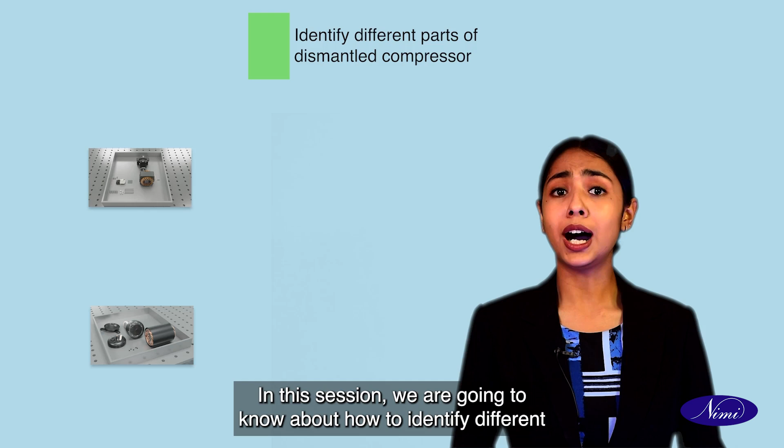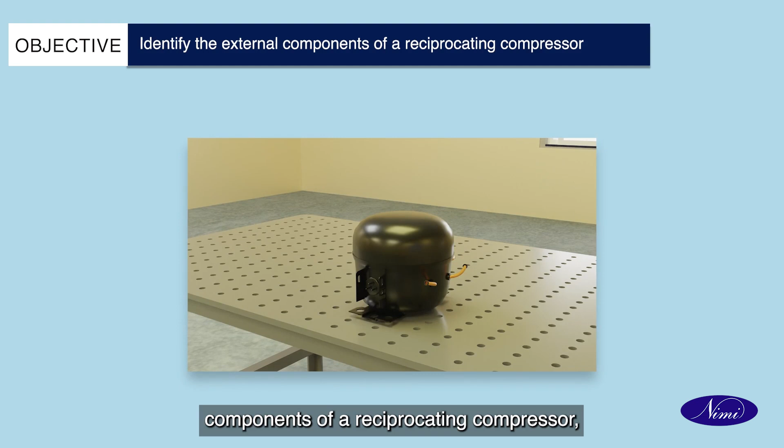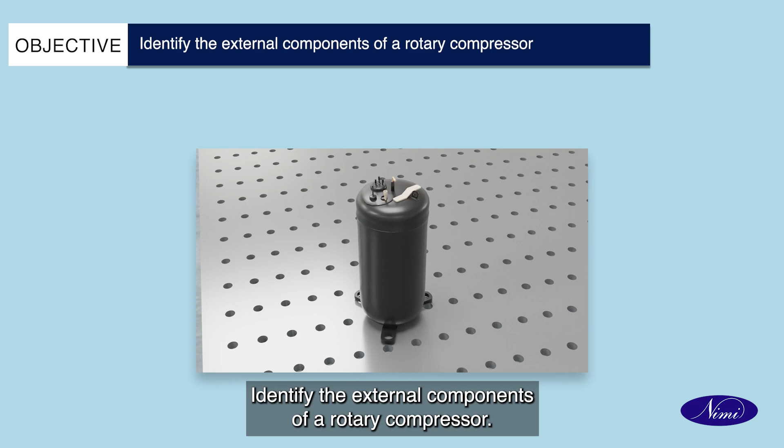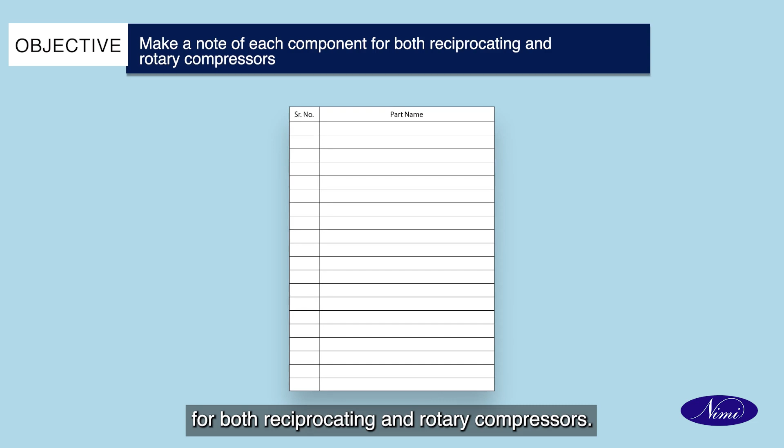By the end of this exercise, you will be able to identify the external components of a reciprocating compressor, recognize the internal components of a reciprocating compressor, identify the external components of a rotary compressor, recognize the internal components of a rotary compressor, and make a note of each component for both reciprocating and rotary compressors.

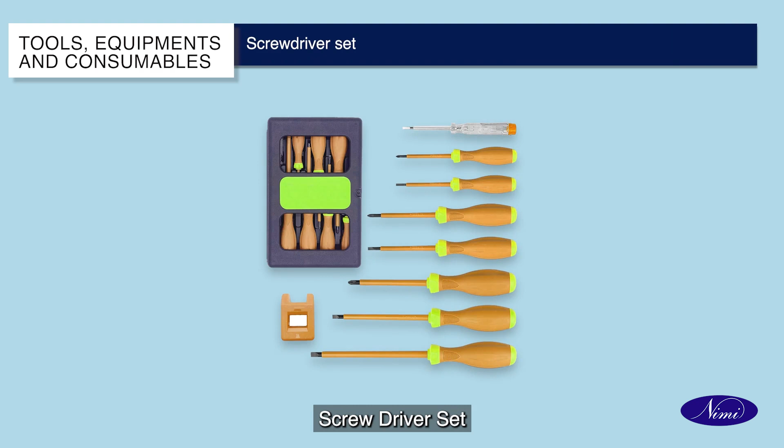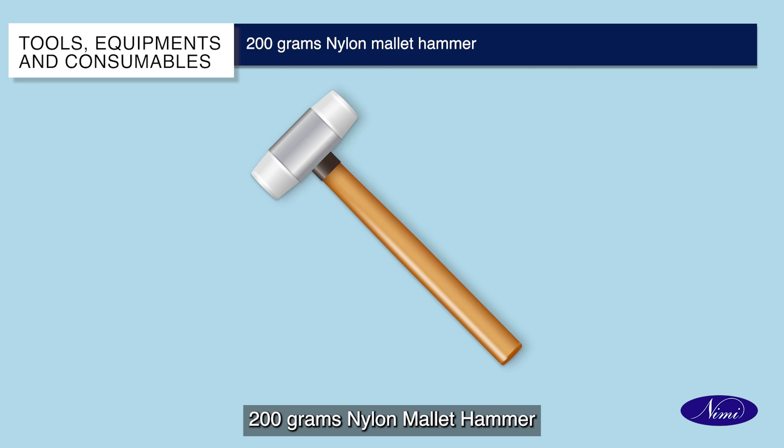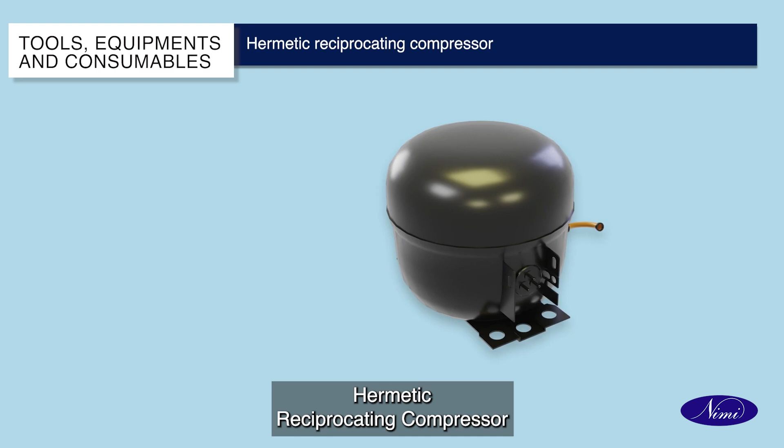Now, let's see the tools, equipments, and consumables: box spanner set with ratchet handle, ball peen hammer, screwdriver set, measuring jar, ratchet wrench, 100 mm nose pliers, 200 grams nylon mallet hammer, wooden and steel work table, mallet or hammer, bench vise, hermetic reciprocating compressor, rotary compressor, dismantled compressor parts, cotton waste.

Kerosene oil, compressor oil. Now, let us see the process of identifying different parts of the reciprocating compressor.

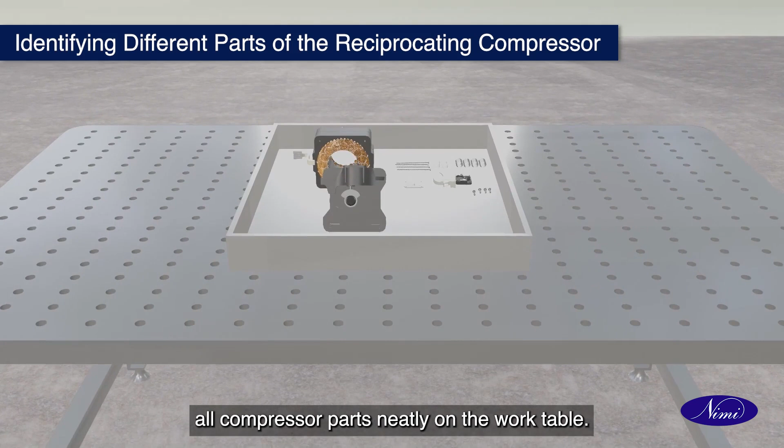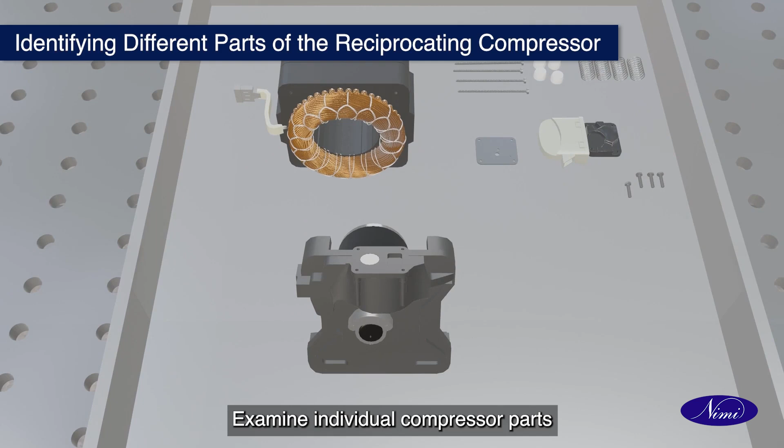Organize all compressor parts neatly on the work table. Conduct a visual inspection of each compressor part, noting its size and shape. Examine individual compressor parts closely to make sure of their dimensions.

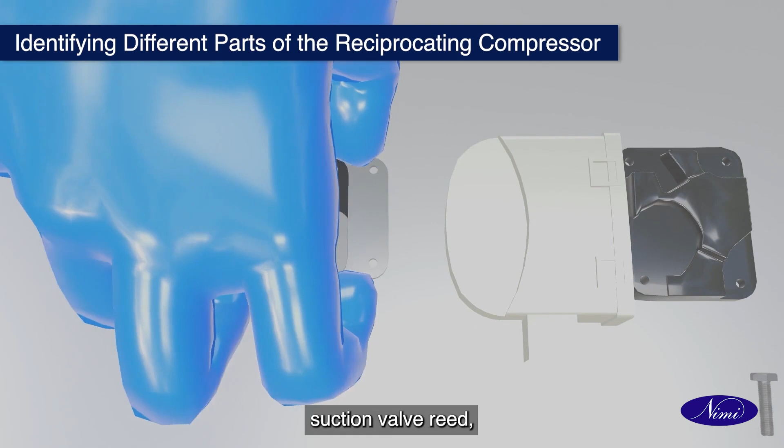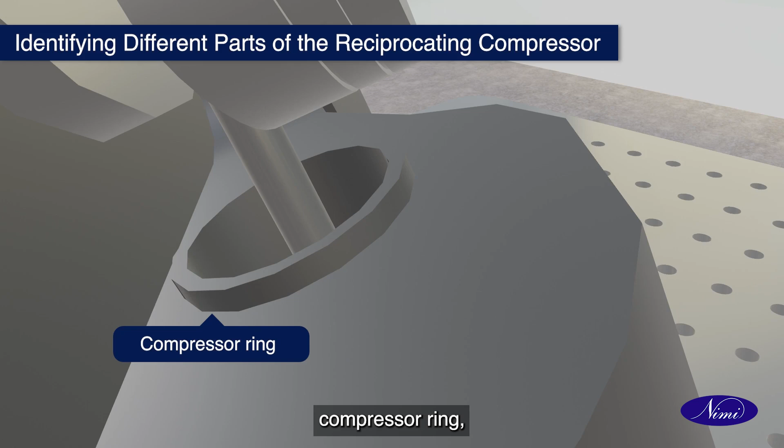Identify and record the compressor parts using table number 1, which includes valve plate, suction valve reed, discharge valve reed, head plate, piston, oil ring grooves, compressor ring, crankshaft, connecting rod, muffler.

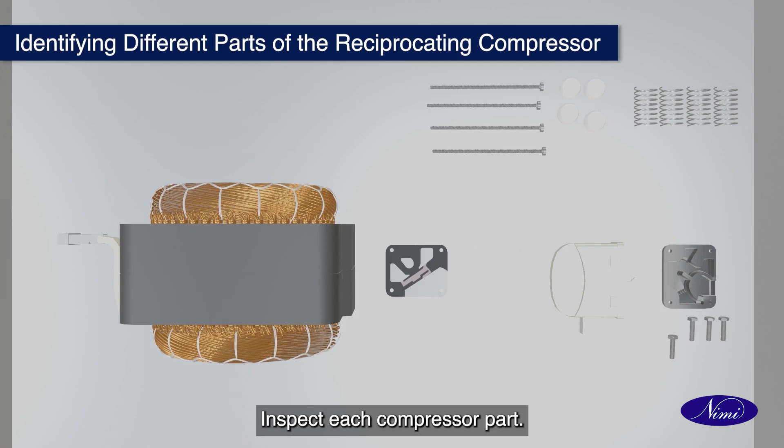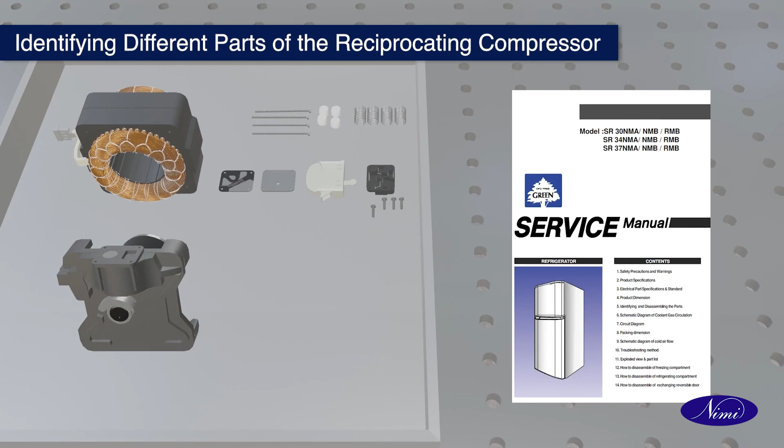Clean all components using the specified oil. Inspect each compressor part for signs of wear and tear. If any compressor parts appear damaged, replace them with new components, ensuring that you are using the correct replacement parts. When replacing parts, refer to the service manual to confirm the part numbers. Apply a thin layer of oil to each component after inspection and cleaning.

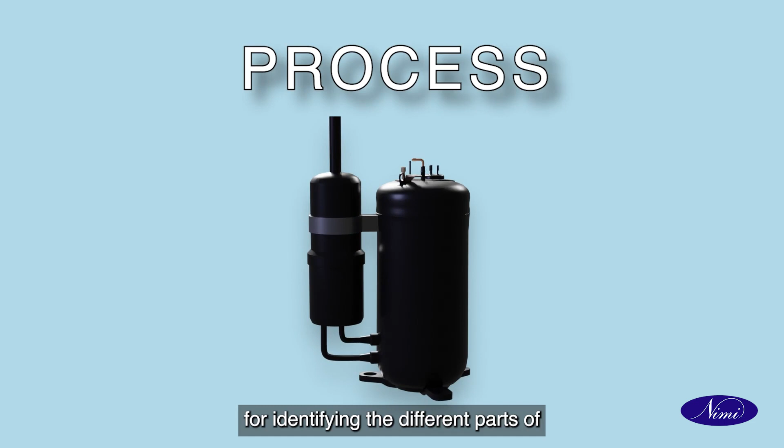Now, let us see the process for identifying the different parts of rotary compressor parts - stationary blade. Identifying different parts of the stationary blade type rotary compressor.

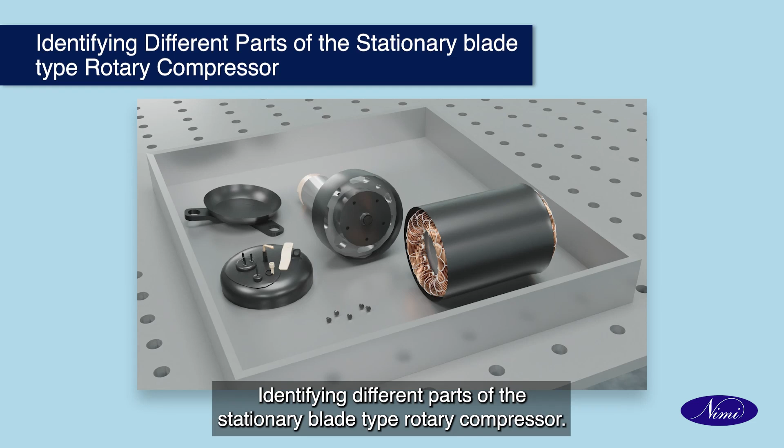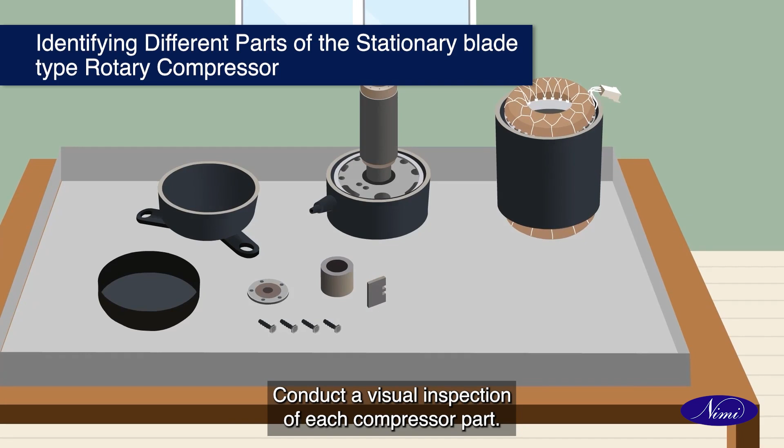Lay out each component of the stationary blade type rotary compressor on the work table. Conduct a visual inspection of each compressor part, observing its size and shape. Examine individual compressor parts closely to determine their dimensions.

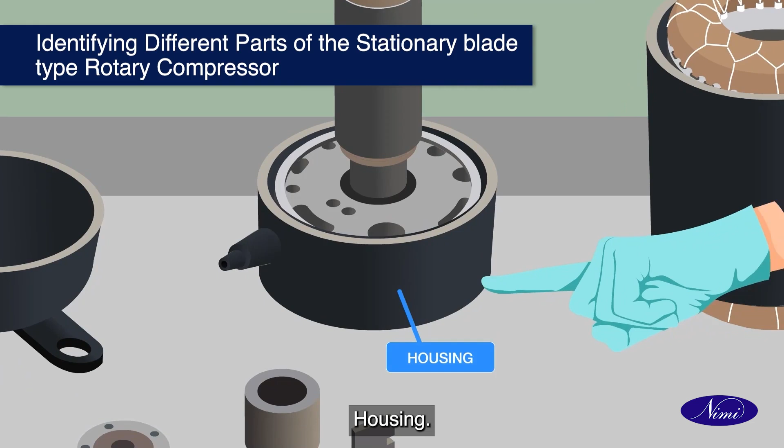Identify and list the parts of the rotary compressor in a tabular column: housing, suction service valve, discharge valve plate, blade, rotor shaft, eccentric shaft, roller impeller, cylinder.

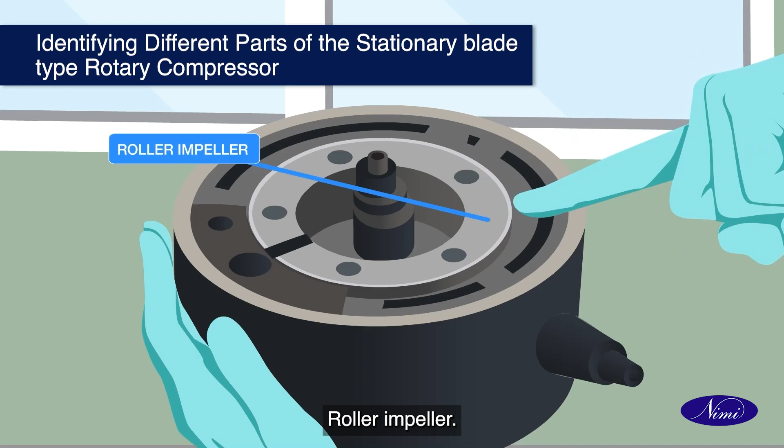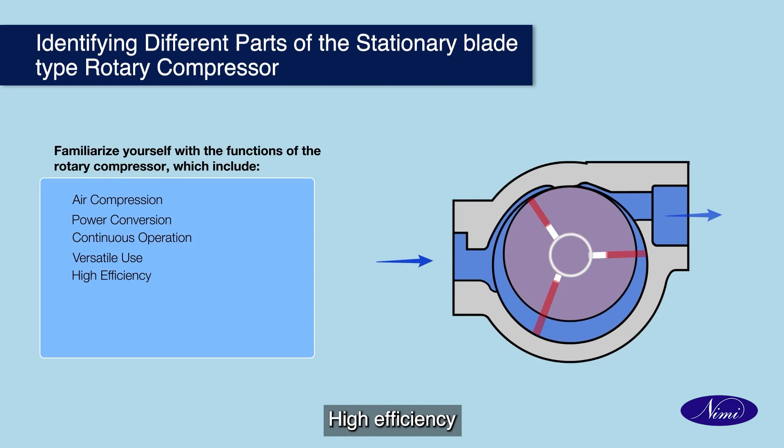Familiarize yourself with the functions of the rotary compressor, which include air compression, power conversion, continuous operation, versatile use, high efficiency, oil injection or oil-free operation, control and regulation, low vibration and noise.

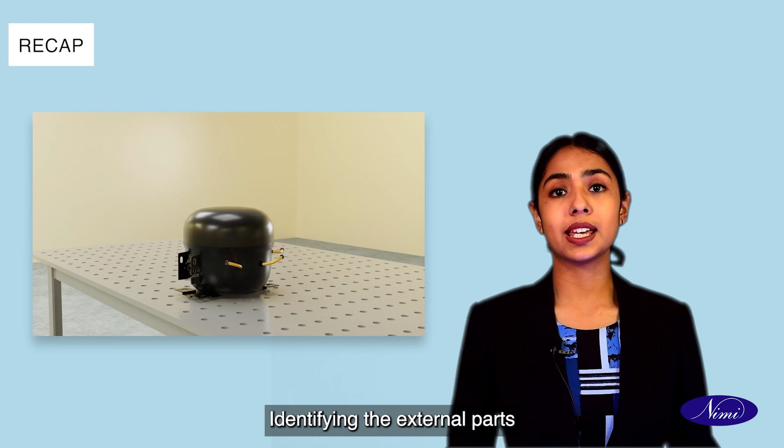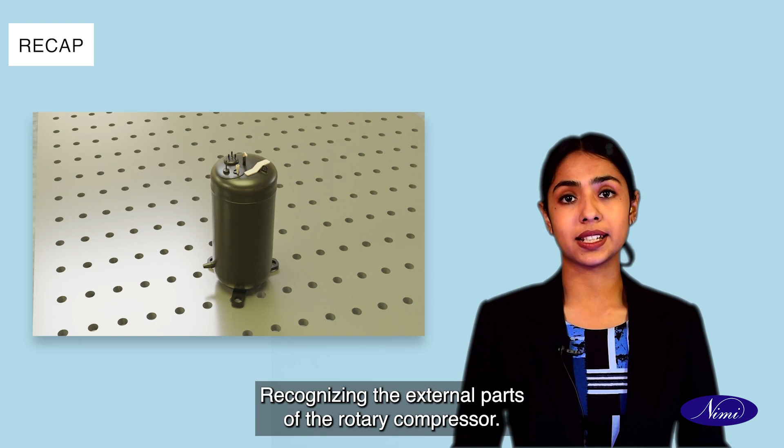In this topic, we covered the following points: identifying the external parts of the reciprocating compressor, identifying the internal parts of the reciprocating compressor, recognizing the external parts of the rotary compressor, identifying the internal components of the rotary compressor, and noting down each component of both the reciprocating and the rotary compressors.

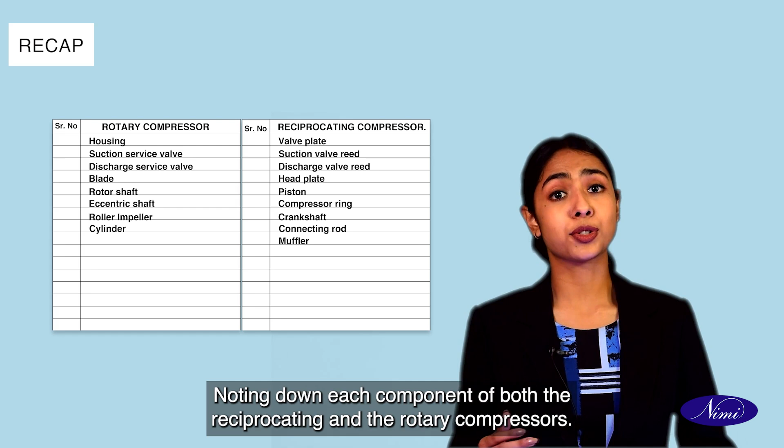I hope you all have understood the process of identifying the different parts of dismantled, reciprocating and rotary compressors.